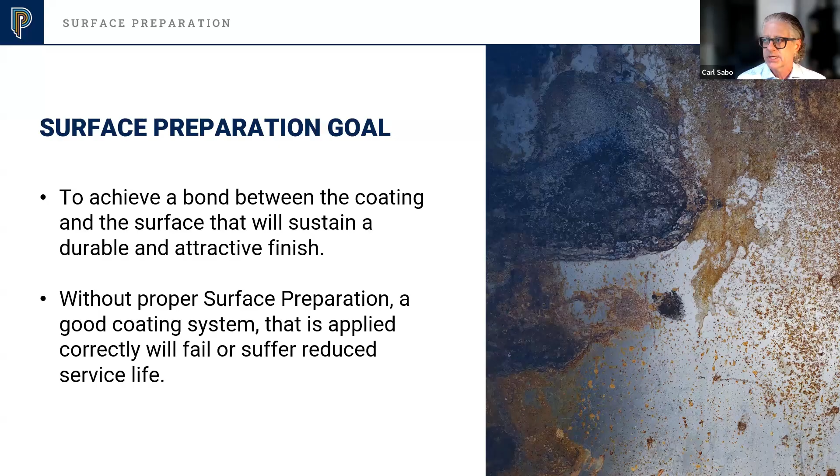So what is the goal of surface preparation? You can see these two bullet points: to achieve a bond between the coating and the surface, and to sustain a durable and attractive finish. Without good surface prep, a coating system will fail or not last as long as everyone hopes. So cutting through all the fancy bullet points, we want the paint to stick, right? We want it to meet owners' expectations. We want surface prep to be something that your organizations do and are able to articulate the importance of to your clients, and why you should get properly paid for doing the surface prep. Hopefully at the end of this, you'll get some of the whys reinforced and articulated.

So the coatings industry estimates, and you get different numbers, but 75% of all failures are due to improper surface prep. Working for a paint manufacturer for all these years, we're not crafting parts for the space shuttle, making paint is pretty simple. So, 75% is surface failures. About 1% to maybe 2% of all failures are due to bad product. That's a fact. I know I'm talking to folks here who put on paint for a living, but this is Carl telling you, this is the industry. So if you take 75 and 2 for bad paint, that's 77. I'm not a real smart guy, but that leaves 23%. So you're probably thinking, well Carl, where's the other 23%? If 75 is bad prep, 2 is bad paint, the other 23 is a bad recommendation, and that could also fall on the manufacturer.

So I would ask all of you, respectfully, always lean into your manufacturer. Let them tell you what the coating system should be. If you're kind enough to buy our paint, or whoever's paint, that's the least we can do, is to give you a recommendation. So the byproduct of improper prep, in reality, is that you've got to send your crew back out there to correct the failure. Regardless of who's on the hook, you've got to go back out there, and that drains profitability from your project.

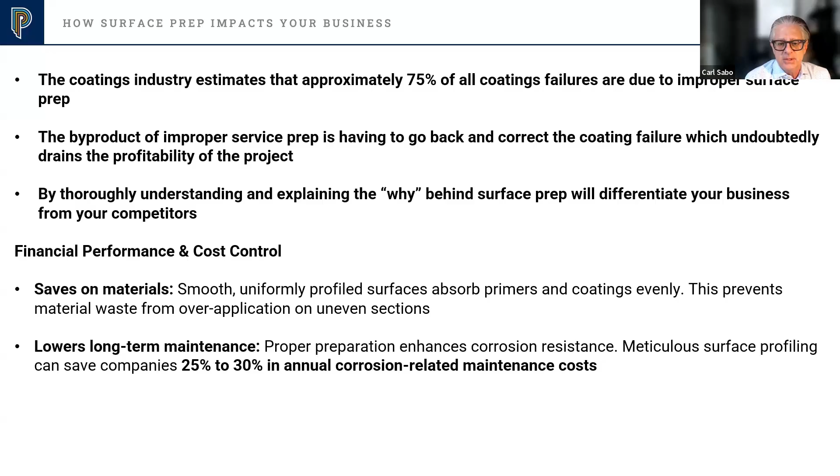A properly prepped surface will undoubtedly prevent material waste, right? A nice, properly profiled surface. Proper preparation enhances corrosion resistance. It just does. You'll see I have a slide a little bit later that there's a direct correlation between surface prep and coating service life. So it's either a pay me now or pay me later thing with a building, with a facility owner.

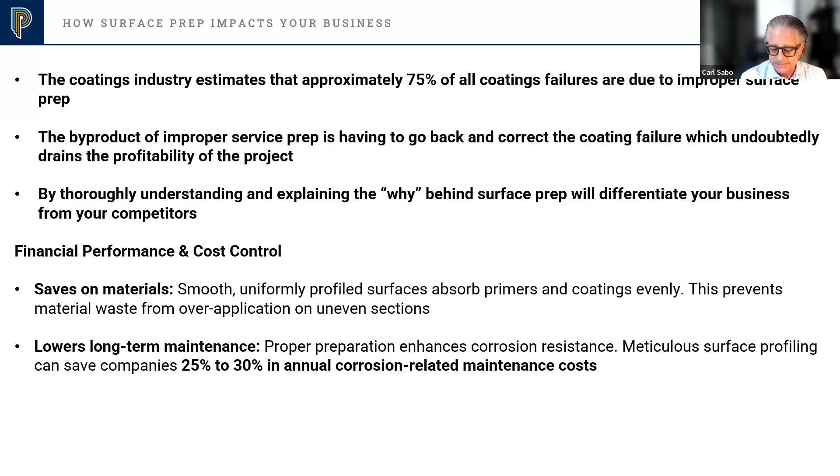Typically when we're preparing steel, any type of ferrous or non-ferrous metal, most often we're using some type of blast media for abrasive blast cleaning. Obviously we also have hand tools, power tools, water jetting, things of that nature. But we're going to spend a little time now and talk about blast media.

And obviously you guys know what this is, right? It comes out about 800 miles an hour with compressed air, or air and water, to strip, etch, or smooth surfaces by removing the old finish, rust, mill scale, etc.

But what's important to know, gang, is the thicker the coating system in mils, the more depth of profile you need. We're not going to get real deep into the blast surface prep standards, but understand this: those are cleanliness standards. Nowhere, absolutely nowhere in those standards does it tell you how deep the profile needs to be.

Understand that. Inherently a white metal blast might get you a certain profile because you've got to work that nozzle. But a properly written specification is going to call out the level of cleanliness and the depth of the profile. We'll probably get into that a little bit later here.

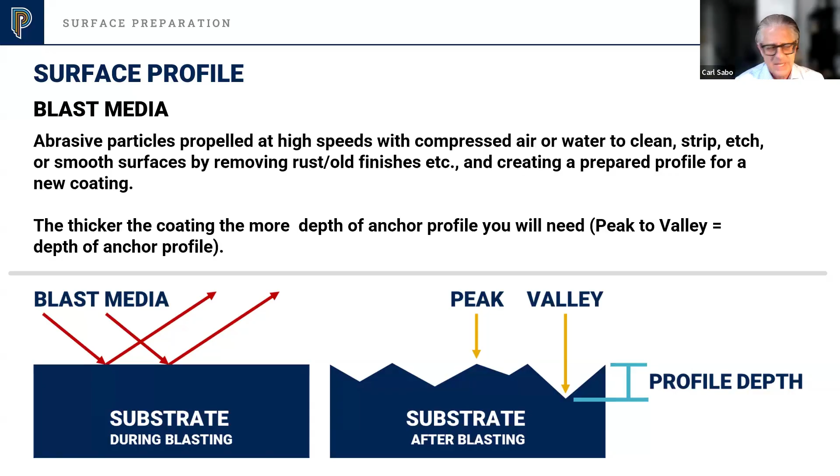So how does blast media choice impact your bottom line? Cheap media shatters, right? You're not getting the same amount of coverage per foot per hour. Different, higher quality medias cost more money, but they clean faster, they last longer, and you're consuming less, disposing less. Low quality media, you're going to burn through more pounds per job. High performance media lowers the total volume needed.

Right, I just talked about disposal and cleanup costs, and using overly aggressive media on a delicate surface can cause harm. We're going to get into this again, gang, and you guys are the experts in this, okay? I'm more of a theory guy. I never professed to be a professional painter. I've held a blast nozzle, sure, an airless spray gun, sure, an air assisted airless, an air driven, sure, yes, but you guys are the experts.

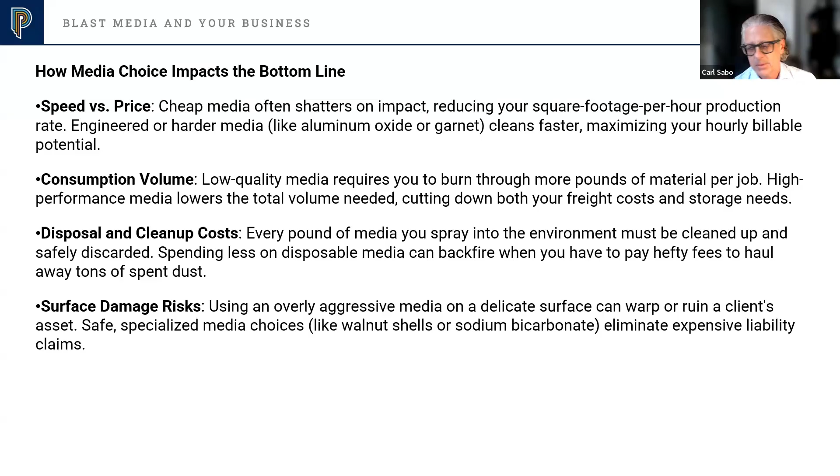I'm not, okay? But one thing you've got to be cognizant of, gang, is obviously you don't want to use a metallic media if you're abrasive cleaning stainless steel, right? I'll show you why a little bit later, because you're going to get that whole phenomenon of corrosion by dissimilar metals. You don't want to use a metallic abrasive if you're blasting stainless, okay? So like I said, we'll get into that a little bit later.

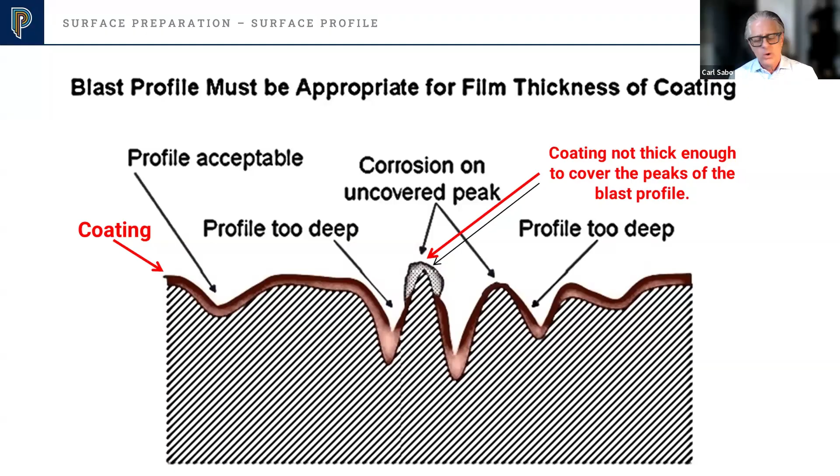So the blast profile must be appropriate for the film thickness of the coating. You've got to have enough coating to cover your profile, or it's going to look like this. You get a call and they say, oh man, I need you to come out and look at this, I think there's a problem. And you look at this and you may say, well son of a gun, maybe it's a paint problem.

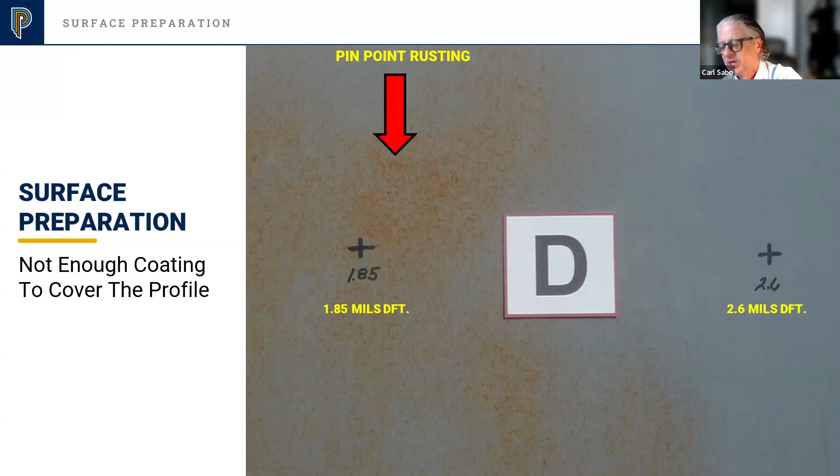What I'm looking at here is probably a 2 mil profile on that surface. Enough paint isn't put on there. It was light, and that allowed the pinpoint rusting to occur. On the right-hand side, you have enough paint to cover the profile. So, in all due respect, this isn't a paint quality issue here.

It's not. I get it, Carl. Makes sense, but it still looks like, you know what, I got to fix it. What the hell do I do? Pretty simple solution, right? Just don't overthink this. Make sure you clean it.

If you're using acrylic paint, you got to wipe the surface down with one of two things: acetone or denatured alcohol. You're like, well, son of a gun, I got a drum of xylene in my truck, or I got some MEK. Can't use that stuff. They have hydrocarbons in it. It leaves an oily residue, right? Acetone and denatured alcohol do not contain hydrocarbons. It's not going to leave that oily residue that's going to impede adhesion.

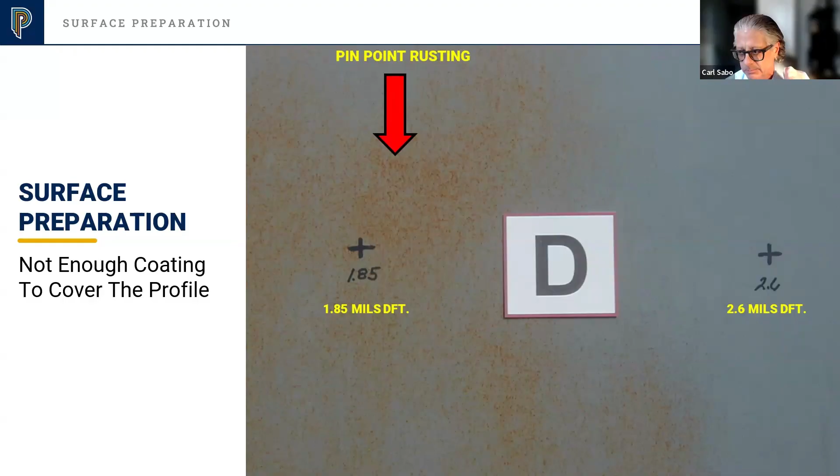Just have your guy go out there, or gal, and put more paint on. They might have to feather it in and make it look pretty, but if you put more paint on, you're going to cover the profile and all things are going to be okay.

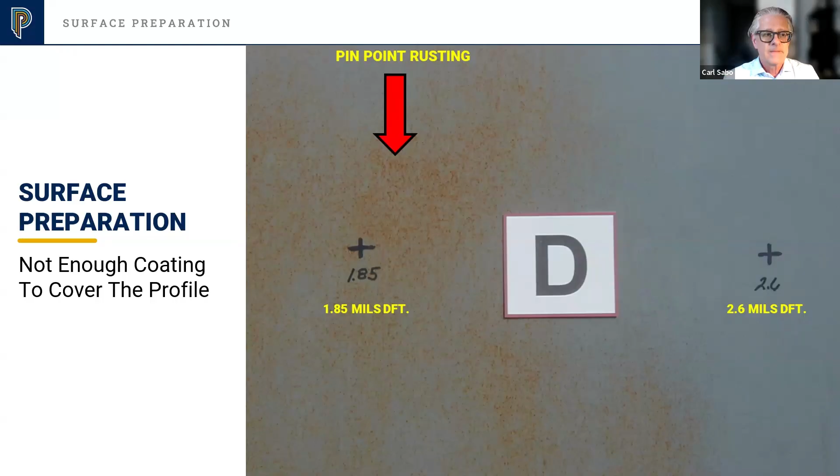So let's talk about some ramifications of under applying coatings. You got to rework it, right? Redoing a failed coating job may cost up to 4 times more. You guys know that number, I don't, but I think we can all agree it's going to cost you more, right?

Labor duplication. You're paying twice for the surface prep, rigging, and the application. Scaffold rentals, right? These are all things you guys do daily, not me. Schedule disruptions, right? If you got to go back, you could be deploying that crew to a new project to generate more revenue. Material waste. You might have to mix small batches for touch up. You might have some waste, you might have some disposal, right?

So supply chain strain, right? You might have to get stuff shipped in depending on who you're buying from. Not everyone has good distribution. You might have to use a coatings company that has minimums that ships from somewhere, right? So that can be a bigger concern with certain companies than others.

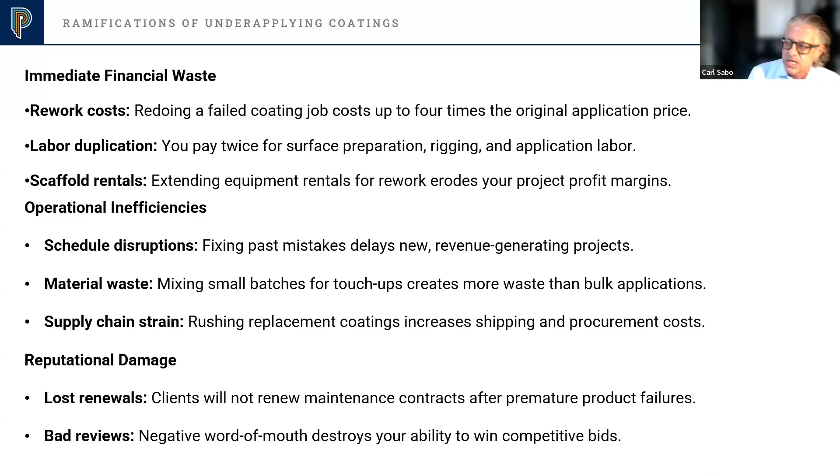Maybe you take a ding to your reputation, right? Clients will not renew maintenance contracts, right? You might have some negative word of mouth. In today's day and age, it's unfortunate. You guys are the business leaders, the business owners, I'm not, and people are nuts. They put stuff on the internet, on Yelp and everything else that is crazy.

How do you measure surface prep? We're not going to get into the weeds here a lot, but that's called Testex tape, gang. That's a piece of abrasive blast clean steel. That's extra coarse Testex tape. You take it, there's a burnishing tool there you see on the left, almost looks like a swizzle stick. Extra coarse tape measures from 1.5 mils to 4.5 mils.

You rub that circle, right? You peel it off, you put it in a micrometer. It measures the indentations that you're going to impart into that circle, that piece of cellophane, so to speak, right? You stick it into a micrometer, you press it, you subtract 2 because the tape is 2 mils thick. Mike's reading 5.5, you're getting 3.5. So that's a real quick way, a manual way to measure surface profile, right?

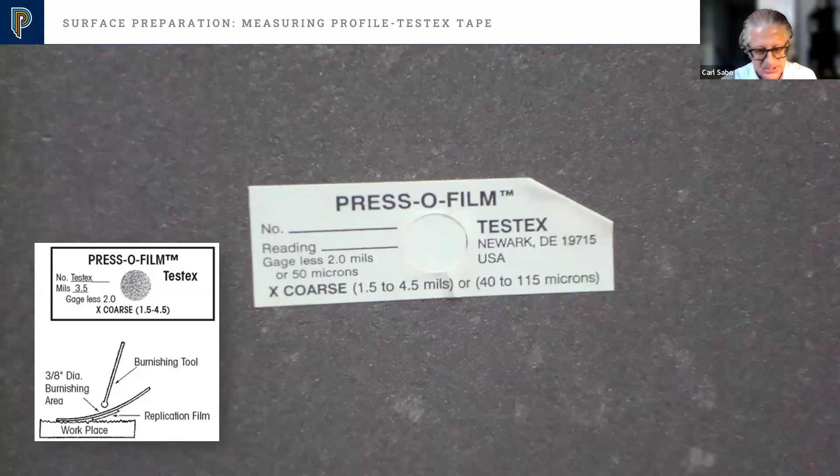A lot of you guys probably got the electronic instruments, right? DeFelsko makes them, a lot of companies make them, right? The old Positector 6000, things like that. Who writes these standards, right? AMPP, ISO. ISO is more of an international concern. Sometimes if you guys are doing work for multinationals, you might see surface prep methods that are ISO SA 2.5.

Or that could be SSPC SP6. So if you ever come across that and need clarity on it, get a hold of your paint rep, whoever that would be, from whatever company you're doing the project with, and they should be able to talk that through for you for sure.

Knowing surface prep standards, in my mind, is just good business, right? It eliminates rework. Coatings fail on poorly prepped surfaces. Redoing a job right destroys margins. We kind of hit on that a couple slides ago. Proper surface prep and profile ensures accurate paint coverage.

So if it's done properly, you're using the right amount of coatings. You're not using too little, you're not using too much, you're right there. It lowers labor expenses if you do it right the first time. It extends equipment life, right? If you're using correct standards, there's less wear and tear on your blast equipment.

There are other ASTM standards you should be checking. If you're doing abrasive blast cleaning, there's the ASTM test to check for oil and contaminants in your media, and the blotter test that checks for clean air going through your nozzle so you're not contaminating your media. That should be done fairly regularly. I don't have the ASTM numbers memorized, but it's called the vial test, where you shake a small vial and check the cleanliness of your media, and the blotter test, where you blow air through your nozzle into a blotter and look at how clean it is.

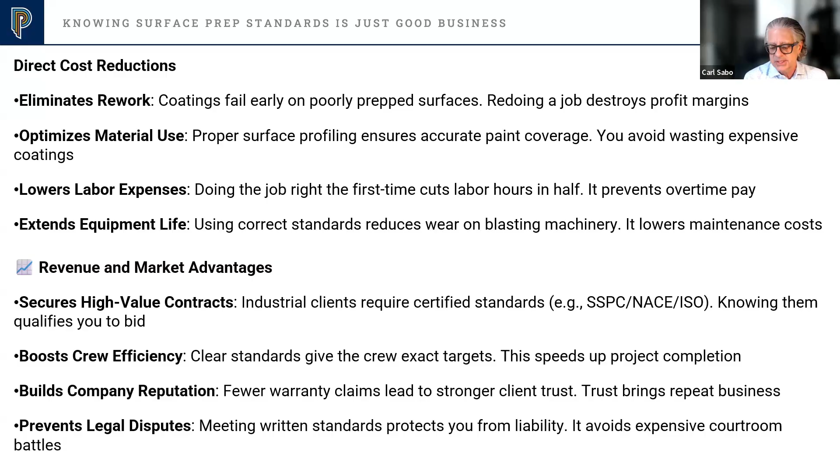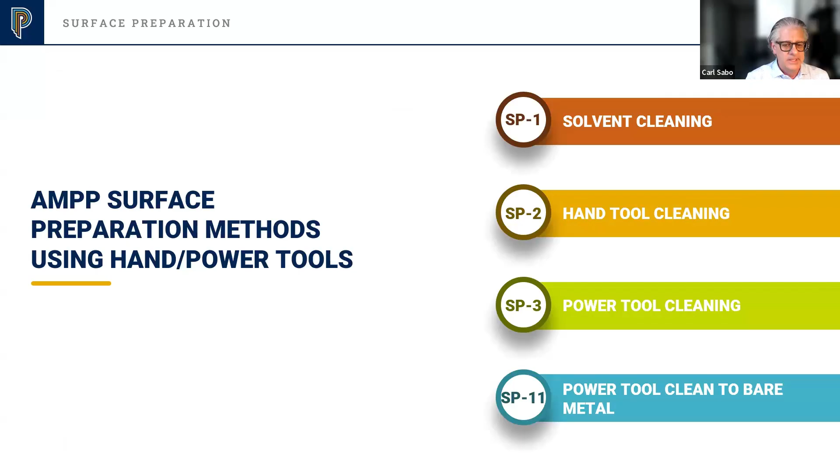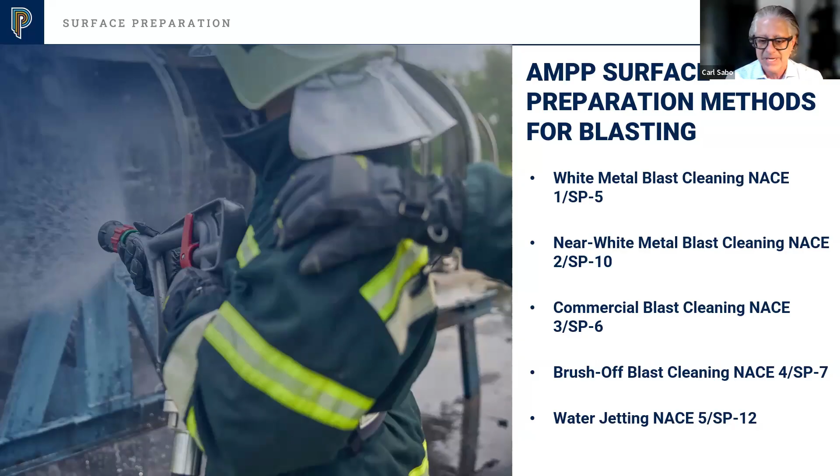Why do you think that is? I'll tell you why. They first developed white, then they developed commercial, and then they decided they needed something in between. And they said, son of a - you know what, we already used the number 6, so let's flip and call it 10. And then NACE came in and said, oh great, let's partner, let's do this, and we'll call ours 1, 2, 3. So that's the reality.

SSPC SP1 - this is really, really important. SSPC SP1 is solvent cleaning. It is implied in every other abrasive blast cleaning standard. What's extremely important here is this is a method of removing visible oil, grease, cutting compounds, and other soluble contaminants. The second bullet point: it is intended that solvent cleaning be used prior to the application of paint and in conjunction with other prep methods.

There are two different types of contaminants, and I know you know this. There's the world of visible contaminants as depicted on this slide, and the whole other arena of non-visible contaminants - nitrates, sulfates, and chlorides - where you have to test for those. There are certain parts per million thresholds that each manufacturer would like you to achieve. What happens to nitrates, sulfates, and chlorides when they come in contact with atmospheric moisture? What do nitrates become? Nitric acid, sulfates become sulfuric acid, and then it can cause osmotic blistering.

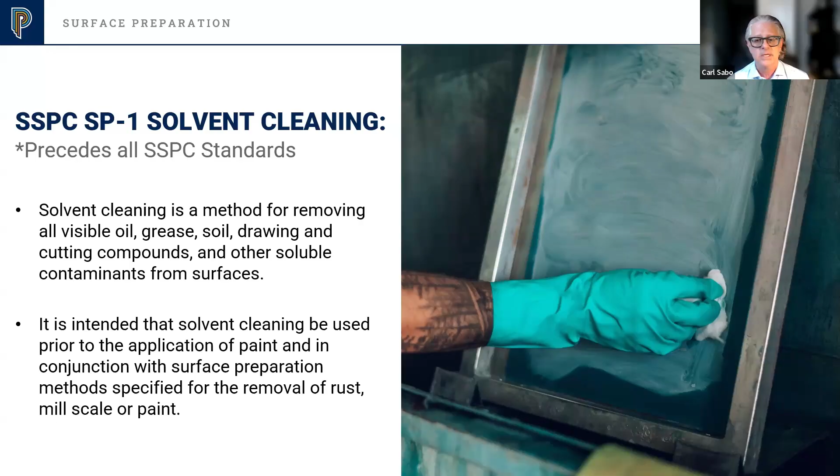So again, these are some of the whys. You could get your right dollar for this, and it differentiates you and raises your level of expertise compared to another contractor you're bidding against. Wow, oh that's - I should, yeah that's a great idea, we should test for non-visible contaminants, we are sitting on a body of salt water. Oh interesting, oh that bid is a little higher, but this company knows what they're doing, and they're trying to prevent a premature failure.

Hand tool cleaning, gang, real quick. You often see this in conjunction with SSPC2, hand tool, SSPC3, power tool. It's the same level of cleanliness, gang.

If you read this, it's a method where loose mill scale, loose rust, loose paint, and loose detrimental foreign matter is removed. So is there stuff left on the surface? Doggone right there is. You're only removing the loose.

So what's considered not loose, or let's call it tightly adhered? That is, you go over the surface with a new putty knife, not one that's been in your craftsman's work belt and has been sharpened. You need a new dull putty knife.

You go over the surface, and what isn't lifted by the dull putty knife is considered tightly adherent. But folks, I got to tell you, what's tightly adherent today might not be tightly adherent next month, next week, next year.

And that is what you have to articulate to your customer, your owner. Hell, we all make paints that are surface tolerant, that are engineered to go on tightly adhered rust, paint and mill scale. All of us do. Okay. But there is, again, we'll get into a slide on this.

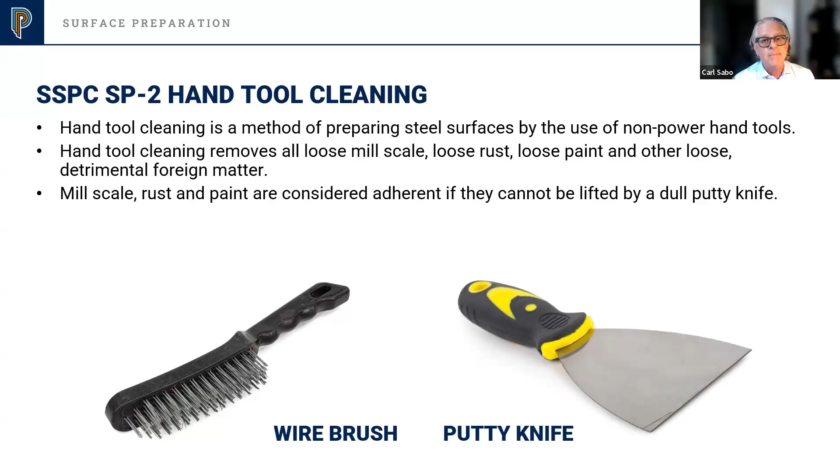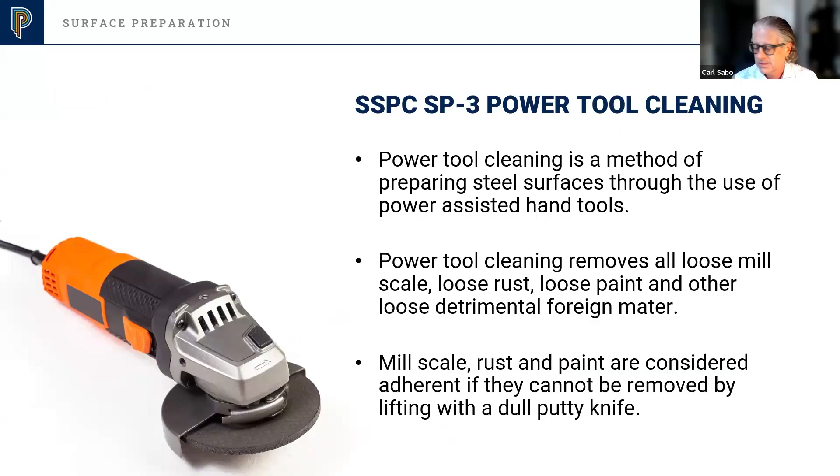Okay, I'm not going to go over SP3. I just said it's the same level of cleanliness as SP2, but you're using a power tool. Okay. Couple examples of some power tools.

All right, let's get into the abrasive blast cleaning. This is white metal blast. Everything is removed, right? All visible grease, oil, rust, paint, mill scale oxides, paint. It's all removed when viewed in a 9 square inch area without magnification.

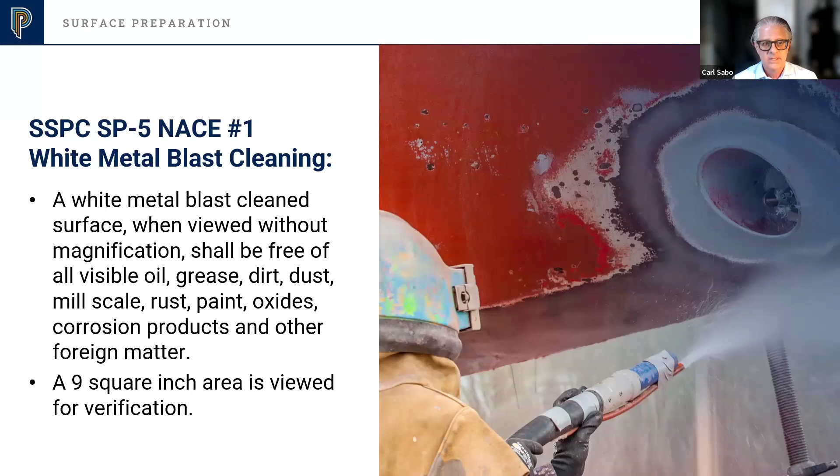Okay. When would you typically do a white metal blast? Typically, we reserve white metal blasting for a coating system that's going to go in immersion for the most part. Okay. Even inorganic zinc, you could get away with an SP10. Okay, an SP10, it still has the same, everything is still removed.

If you look at the second bullet point, that isn't 5% of paint and rust remaining. That's just 5% of residual staining. Okay, minor discoloration caused by stains of rust, mill scale, and things like that. Okay, that's near white metal blast. You do it on a tank lining job where you're taking off an old system, an SP10, 99.5 times out of 100 is sufficient. Okay, gang?

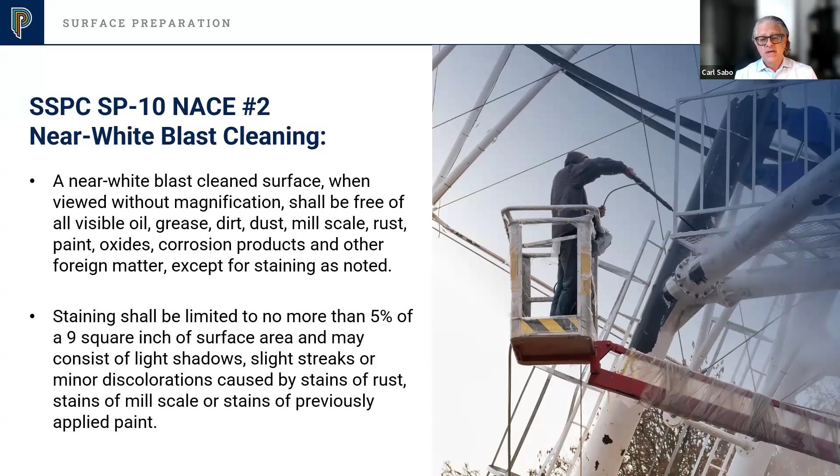Here's the one you guys probably do for those of you on the line that are doing abrasive blast cleaning. SSPC SP6 is commercial blast cleaning. Please understand, everything is still removed. That 33% is the residual staining or shadowing from all the rust you took off the steel, right? All the mill scale, all the previous coatings, right? For atmospheric exposure, this is the abrasive blast clean standard that you could get away with 98% of the time.

All right, we just went through these 3 standards, and nowhere does it call out how deep the profile is, like I said on the onset of this presentation.

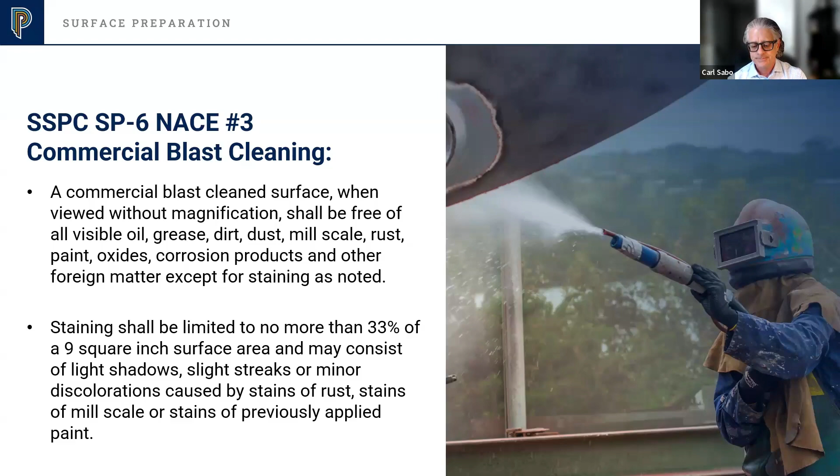Right, SSPC SP7 is a brush-off blast cleaning, used a lot of times for repaint applications. Gang, a brush-off blast, sweep blast, whatever you want to call it, is you still got stuff left, tightly adhered.

Okay, so just be careful when you're abrasive or sweep blasting, because if you get a little bit too thorough, you could fracture the paint that's still left on the surface, and then all hell breaks loose when the new paint is put over it and the surface tension and the new stuff biting down and drying. So if you're sweep blasting or brush off blasting, please do exactly that. Okay.

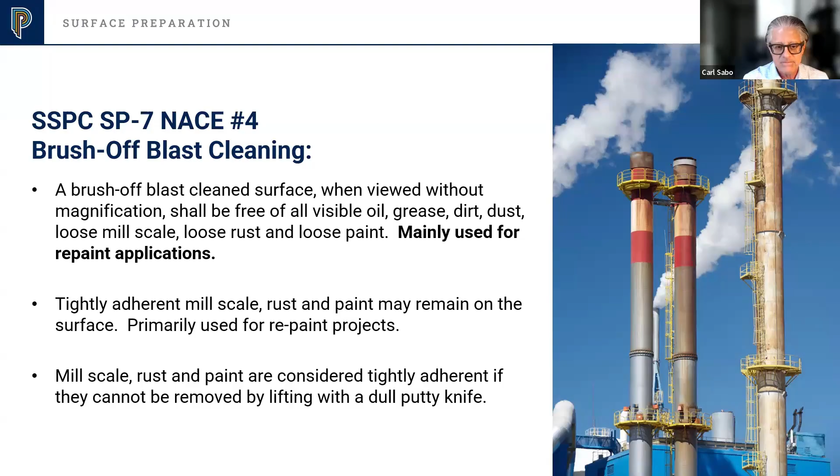And again, these aren't all the standards, right? Come on. I mean, there's SSPC SP16 for non-ferrous metals, right? For galvanized. I mean, I just wanted to kind of give you a little flavor here.

Here's water jetting, gang. Understand, water jetting does not create a profile. Straight water. I didn't say water mixed with sand, okay? Straight water. Even at 25,000 PSI, it's going to blow your foot off if you don't have your right PPE on, but it's not going to put a profile on the steel.

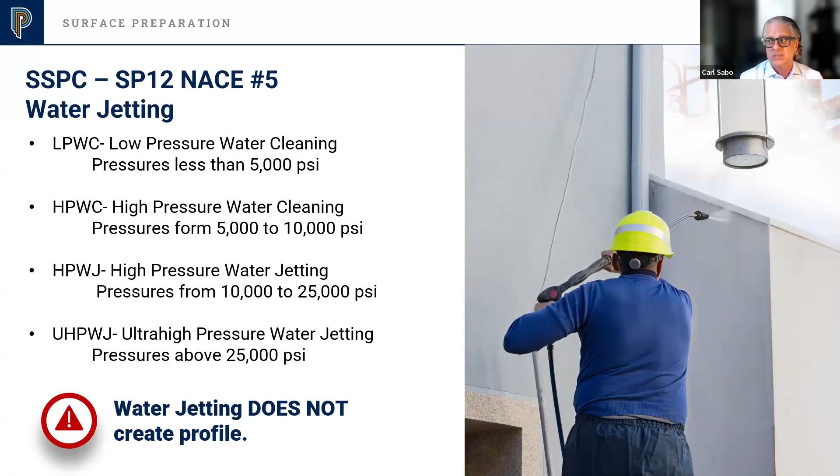Okay? So again, ultra high water jetting is really, really prevalent in the marine industry. Not to say you guys haven't done it or can't do it, but you got to put the water somewhere, right? So just know that. Types of abrasives, right?

Right, sand. A lot of times folks aren't using sand too much anymore. But you have garnet, mineral slag, Black Beauty - that's a trade name. What is it? It's a mineral slag, typically coal slag. Steel grit, steel shot - I said this at the onset: don't use steel grit and steel shot if you're blast cleaning stainless steel. You've got your organic media, corncob, walnut shells, glass, baking soda.

Sometimes baking soda will get a surface clean, but it's not going to do anything to create a new profile - it'll just expose the existing one.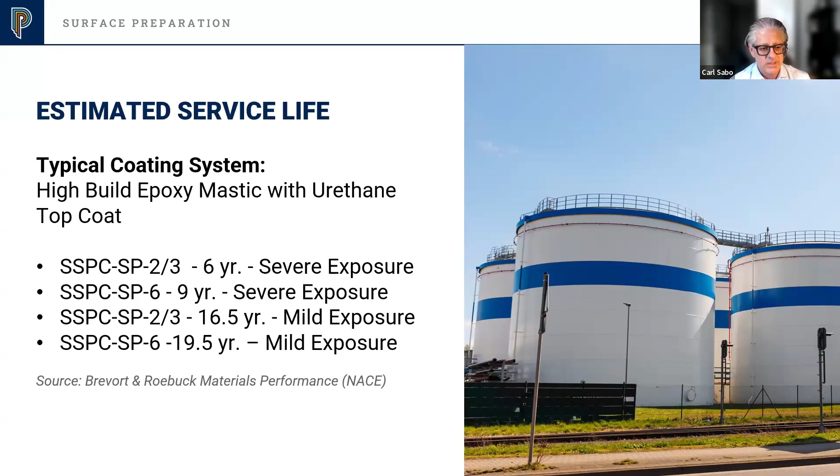So if you're trying to sell a certain prep to your owner or specifier, you could point to this report, this document, and that's why I'm recommending this. I could do SSPC 2/3 for this dollar amount, but if you want this cleaner surface, here's what you're going to get. And you can see it in a mild exposure - say you're in Des Moines, Iowa, in a cornfield. If you're not by salt water, it's pretty temperate for the most part, you're going to get a little longer performance.

So how does surface prep impact service life? Failure to remove all types of contaminants, whether visible or non-visible - if you prep right, you get rid of the contaminants, it's going to last longer. You're going to need that for the most part, gang.

Your profile should be at least 15 to 20%, at least 20% of your dry film thickness. You've got a 10 mil coating system, you should get at least a 2 mil profile, say 20%. The increased profile gives the coating system more area to mechanically bond to. Sure, you're going to use a little more paint - who are we fooling - but the important thing is that a good profile increases the surface area so the paint has more contact areas.

Equipment life cycle improves, right, we kind of talked about that. Hopefully, if you're not going to rework, you're mitigating the risk of on-the-job workplace incidents, and fewer incidents probably costs you less in premium. And hopefully doing the job right, giving your crews the right information and the right equipment, keeps morale high, and folks continue to take pride in their work.

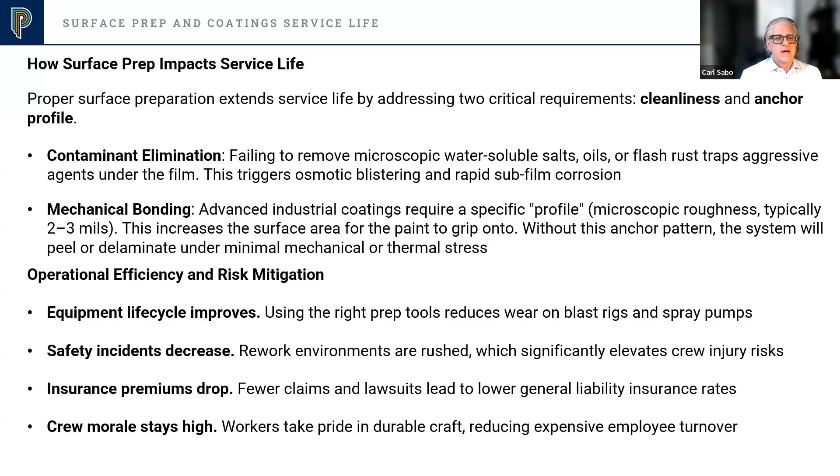I'm sure you guys know what stripe coating is, gang. Stripe coating is very important. I like to write it into my specifications, especially if we're dealing with a lot of nuts and bolts and angles, because those are the first areas to fail - those areas are hard to get proper millage on, dry film, because paint inherently pulls away from edges when it dries.

So what is a stripe coat? A stripe coat is a full coat of paint - you can do it by brush - a full coat of paint on those hard to coat areas. You can see on the slide here: weld seams, nuts and bolts, edges. You can see how if you do a stripe coat, it improves coating service life.

Again, you're trying to sell this to the owner, and to whoever the specifier is if you're working for them, and they might say, okay, I understand - why the hell did company XYZ write a stripe coat into their spec? They weren't thinking of it. So sometimes the owner might say, dude, I don't want to pay for it. But you could sleep at night telling them this is the benefit. And unfortunately, you might have to tell them, I told you so.

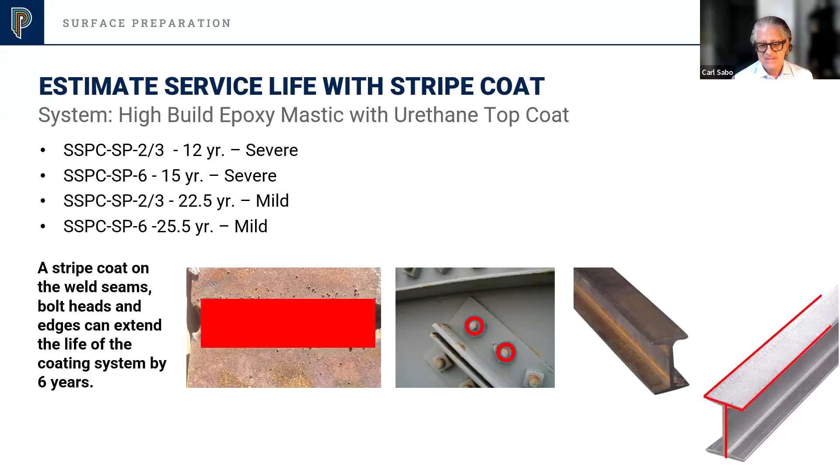All right, corrosion by dissimilar metals, real quick. This is why, gang. This is the galvanic scale. Things near the top are much more active, or less noble. On the bottom are least active, more noble. You see zinc, number 2.

You guys put zinc primer usually on carbon steel. The more active metals will sacrifice themselves to protect the least active metal. That's why zinc primers work. They give you galvanic protection.

But you might go look at some job sites, gang, and I'll get into it now. If you have metals of two different activities, so to speak, and they come in direct contact with each other, that's called corrosion by dissimilar metals. As you can see here, this is probably a stainless steel band on a carbon steel pipe, and there's probably some paint on the other side of that band that moved up and down, and that band started hitting the carbon steel.

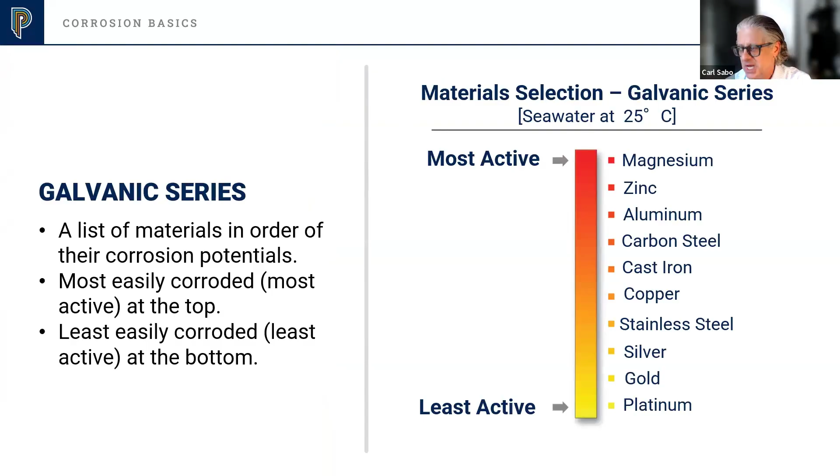And you walk a job with an owner and you see that, and you tell them, hey, dude, this is probably why you're seeing this, is because of this corrosion by dissimilar metal. And they said, wow, never thought of that. How do I fix it?

Well, you fix it a couple of different ways, right? You could tell them to change the band and get it to the same metal. Buy a carbon steel band. I know your intentions were good here. Stainless steel bands are expensive, but if you know it's a dissimilar metal, put a rubber gasket around it so they don't touch each other, right?

So again, these are the preventative actions that you want to do. Identify these problematic junctions, right? Like aluminum brackets touching steel screws. Include isolation hardware in your bid and articulate the why. And again, they might be saying, why the hell didn't anyone else tell me this?

So, yeah, write this, make sure your firm is not liable if they go ahead and do that. That's just not a paint problem, gang, and it's not a product application quality problem. It's an engineering problem. It's a maintenance issue problem. Don't be held on the hook for anything like this.

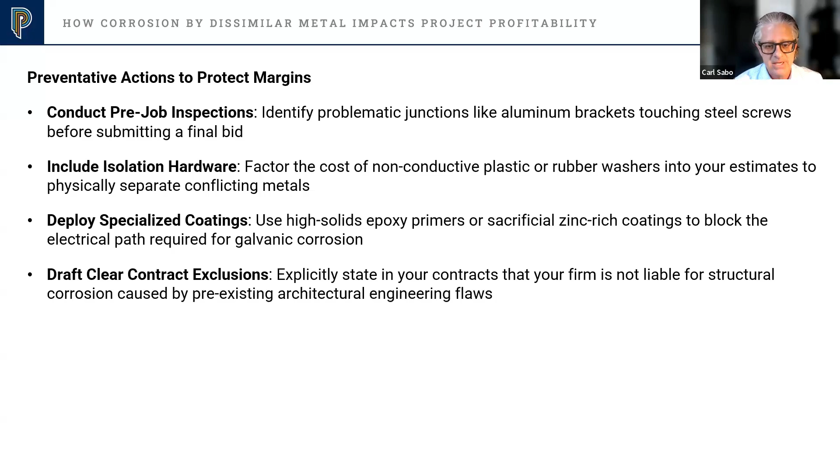Please, in all due respect, it's not a paint problem either, gang. It's not. But just, if you're aware of it, make your client aware of this phenomenon. And if they're not willing to do any of these things to mitigate it, don't put yourself on the hook for this stuff. It's your decision, but just saying.

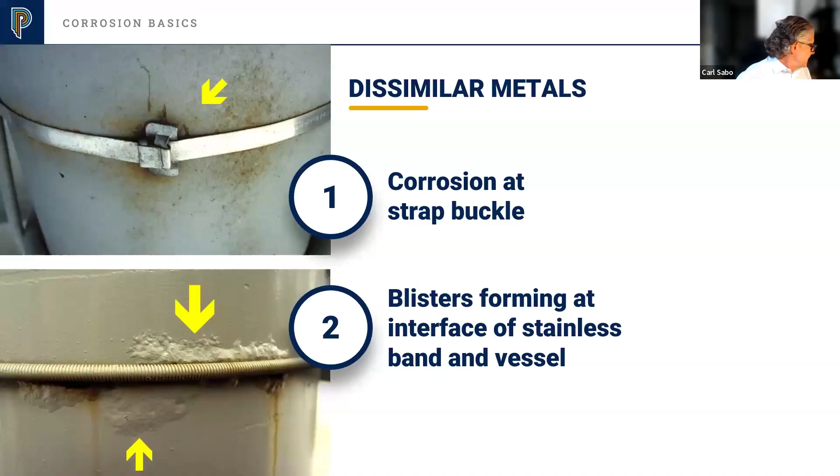So, gang, it is 2:38. That is everything I have. Are there any questions from the group that I could answer about anything? It'd be my pleasure to do so. Anyone?

All right, Karen, are you still with us? I am here, Carl. So no questions? Well, I don't think there are.